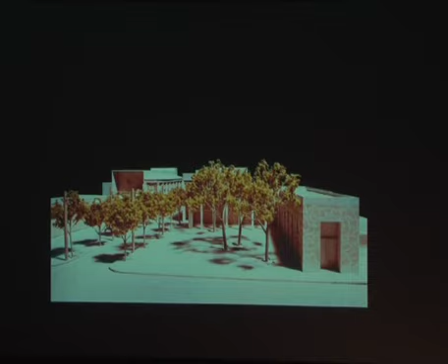Each of the buildings developed a similar architectural element, including a repetitive base system that organized covered arcades at street level, as well as open loggias on the upper story of the primary facades, as you can see in the sketch on the left. They also shared a similar palette of materials, including smooth stucco surfaces for the primary building elements, and in some cases colored cement tiles for architectural details.

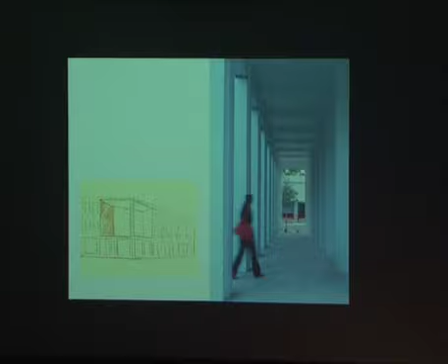Generally speaking, what we developed was a strategy for coherent lighting and streetscape design, which we thought would enable us to heighten the visual unity of the streets.

Returning to the plaza, which was always for us the heart of the project, we transformed the existing parking lot into an urban carpet of Caribbean oolitic limestone. The use of this limestone was very important because it's a material that connects the site to its geological region, to the area of Miami and the Caribbean, but also to Miami's public building tradition.

On the other hand, the edges of the new space were defined by a thin bar building and loggia. Here in this image, we see them fused together as a single building, these two.

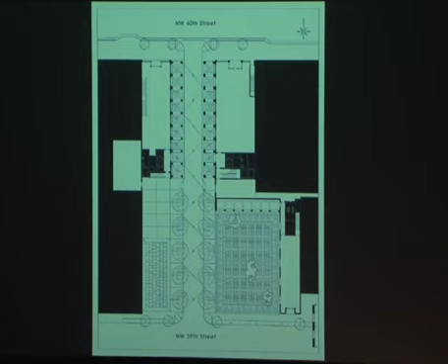We believe that this continuous urban wall would allow us to create frontages along the new space and the adjacent streets. Something important to mention is that both the form and placement of the thin bar building and the loggia resulted from the highly constraining and reduced space we had to work with, given the location of the existing large oak trees on the site.

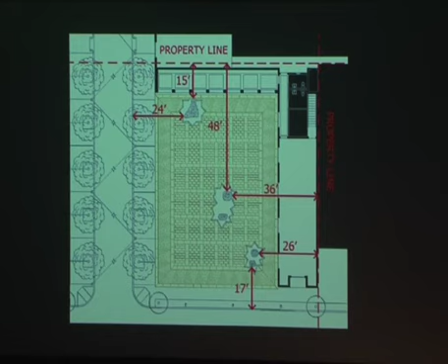So we literally developed a scheme that relied on thinness. Therefore, and almost inevitably, the building developed as an L-shaped building in plan that both configured the space of the plaza with a coherent urban geometry and also provided spaces for retail and leisure.

This early sketch shows our initial ideas of developing this single building that addressed the street and the plaza, becoming both, in a way, urban infill as well as liner. It also addresses different scales of events associated with each.

For example, in the case of the narrow door you see on the far right of the sketch, along the main street, this door is both proportioned and scaled to that event, while the 50-foot-long bench, which eventually would become integrated within the loggia, was scaled to the plaza and also to the view of downtown Miami beyond.

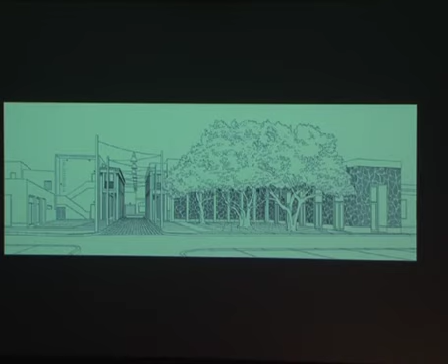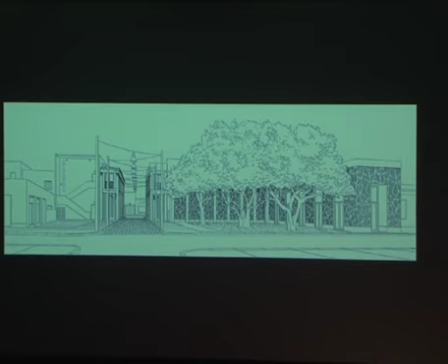When it came to the design of the actual building, we employed Miami's vernacular. We felt it was appropriate to work mostly with concrete block and steel trowel stucco construction, in the end cladding most of the building, most of the final surfaces, with a brilliant glass mosaic tile.

The references for the tile cladding are also associated with figurative traditions that can be seen throughout the tropics, but also the design district itself, since from the beginning we always thought that the elevations of the building should be understood as permanent urban paintings, or urban murals, let's say.

But we also used tile because we were aware that either in the Caribbean or in the distant landscapes of Thailand, for example, tile has been used in the cladding of buildings throughout the tropics. This, for us, made a great deal of sense, since these tiles provide an ideal skin for these tropical buildings.

Also, in the design of the elevations, the gradations of colored tile we thought would generate a rhythm of changing effects, which results in a kind of dematerialization of the building's surface.

We think that while these facades cannot be classified as lightweight curtain wall, in our minds they do constitute a kind of free facade, insofar as the visual quality of the surface is seen as kind of independent of the wall's tectonic conditions. Furthermore, as I just mentioned, we believe that the intense use of color and the reflective quality of the material would allow the buildings to be both cleansed by the incessant rains...

...and protect themselves from the strong light of the tropics, a light that most of you know could be very violent sometimes, and it bleaches and weathers its buildings in this region rather quickly.

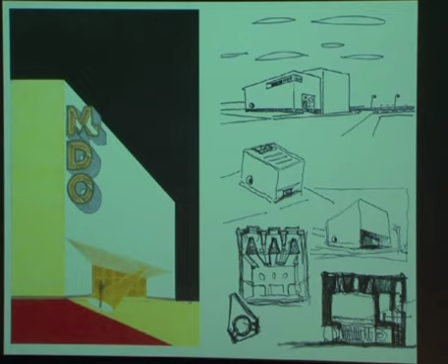But in a way, we also took it on because Carie and I wanted to engage a real, not an idealized, Miami Main Street, aiming to confront the aesthetic challenge of working within the quotidian commercial landscape, recomposing and transforming the elements of the commercial vernacular, including signage, commercial shopfronts, the suburban lawn, and even the painted asphalt that covers most of the city's streets.

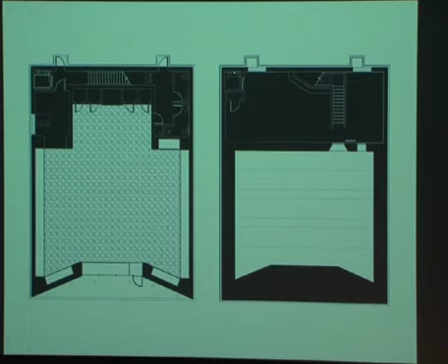The plan's thickened walls, these poché walls you see, are lined with stacked rows of merchandise, in this case mostly men's suits, placed around the main space in the front of the building, while most of the services, office space, and other rooms such as changing rooms are placed in the rear and on the second floor above.

In section, the heightened volume is an intentional shift in scale, meant to be an unexpected spatial experience for an area mostly defined by low 8-foot ceilings typically stacked one above the other.

The section also shows our concern with the manipulation of daylight. We chose to flood the building with natural light, converting the strong, direct natural light typical of Miami into a soft, indirect ambient light, in direct opposition to the somewhat cavernous, artificially lit interiors typical of the adjacent buildings, malls, and office parks nearby.

The skylights also provided us with an opportunity to hide some of the mechanical systems needed, such as electrical systems as well as air conditioning systems.

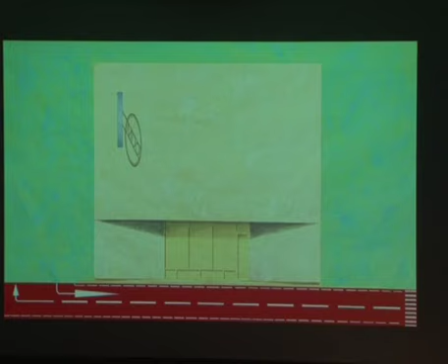As I mentioned earlier, this is a sketch drawn with gouache and Prismacolor. The project started at the beginning of the recession, and almost by necessity we were obliged to explore an architecture of scarcity. We developed a language of abstraction and restraint, where the range of materials and compositional moves were limited to a few carefully selected elements.

One of the most prominent elements is a 10-foot diameter metallic sign, placed perpendicular to the building's front facade. By removing this sign from the clutter of signage that punctuates the existing road, 8th Street, and setting it against a mute blank wall, that wall would provide a neutral backdrop—so an element that would otherwise be ordinary would immediately become special, perhaps even extraordinary.

In addition, as you can see in this image, the front elevation is inflected in order to compose a 12-foot high glass shop front and to produce a much-needed recessed space that protects the visitor from rain or sun upon entry.

We also thought that would imbue the building with a degree of corporality, a degree of solidity, which would again be in sharp contrast to the persistent thinness of the adjacent buildings.

Here, once again, we wanted to produce an illusion of thickness, so we poured a deep circular concrete window and pressed the glass deep into the space of the opening. This recess would produce a more dramatic shadow on the southern elevation, and would also highlight the compositional difference between this window and those of the surrounding context, while reframing the surrounding landscape as one stands looking out from within.

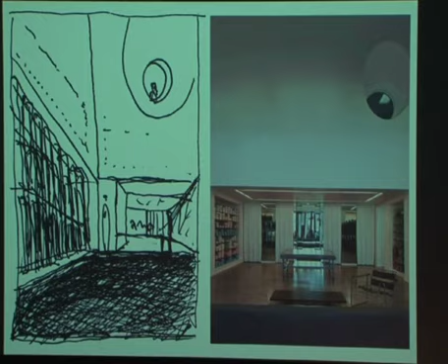This is a detailed view of the signage as finally executed, designed to be viewed from either 8th Street, Calle Ocho, or the perpendicular street from Calle Ocho. It also shows the thin cap that was designed minimally to terminate the top profile of the building, but also to articulate the building as it meets the sky.

So now we're going to have a change in project and a change in voice. I'm going to present the remaining 3 projects. This next project is, I think, quite different than the first 2 that Adib just presented.

The project involved the restoration and completion of a historic house located within Coral Gables, Florida. Coral Gables is located just south of downtown Miami. It was developed by George Merrick, a developer who, in an extraordinary way, also happened to be a poet. He was responsible for planning one of America's first garden cities.

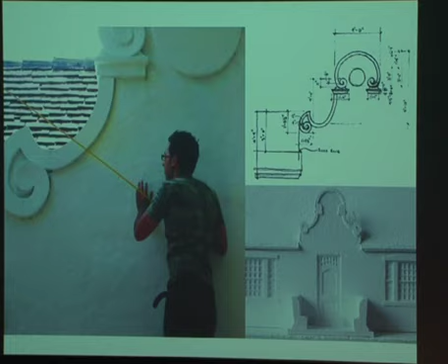Because what you have to keep in mind is most of the local builders in the area have in fact lost the knowledge of how to restore these historic details.

During the 1920s, the writer and leading Florida conservationist Marjory Stoneman Douglas, best known for her work The River of Grass about the Everglades, poetically described the architectural characteristics that defined Coral Gables' residential architecture. She spoke of the discrete elements that gave these houses their charm, including the undulating surfaces of the stuccoed walls, capable of catching and reflecting the intense Florida sunlight, clay roof tiles that created a rich watercolor-like pattern ranging from rust to pale greens, lime-based paints that gracefully weathered under the Florida sun, and finely crafted wood windows and balconies capable of opening the houses to the prevailing breezes.

When Adib and I read Stoneman Douglas' text, her words resounded with us, because these were the very same characteristics that were systematically being stripped away from most of the houses being restored within the city today.

Natural materials are always being replaced by synthetic ones that lack the craft and, more importantly, the sensorial qualities of the original. This reality, this very small reality, is changing the character of the streetscape and ultimately of the neighborhood. So for us, this project was about working slowly and paying close attention to those small things that we believe make a world of difference, particularly when repeated time and time again in the building fabric of the city.

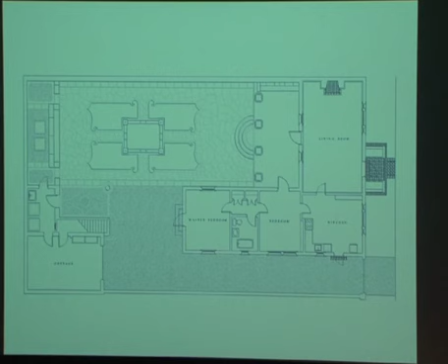I have to say that throughout the entire project, the words of our teacher, Vincent Scully, kept resounding in our heads. Scully was on the faculty while Adib and I were undergraduates, and he inspired generations of students.

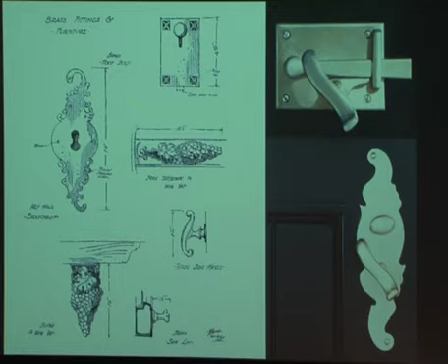This palette extended itself to the selection of objects for the interior, including all the furniture and the artwork, and we worked closely with the clients to develop the interiors. For us, the interiors bring together tradition and modernity, setting the work of contemporary Dutch designers such as Maarten Baas and Marcel Wanders alongside examples of traditional South African folk art. It is a world where the old and the new can comfortably coexist, and this is an affinity that resounded with us and with our clients.

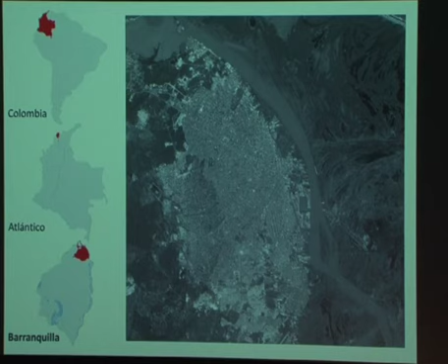Decades of suburban sprawl resulted in the abandonment of the city center and a slow process of urban and architectural degradation. So today, the city center is overrun by retail that generally occupies the first and sometimes the second stories of the buildings, with the upper floors largely vacant.

When Adib and I read the brief for the competition, we were struck by the omission of any discussion regarding one of the greatest challenges facing the redevelopment of the city, and that's this.

Now, Adib was familiar with this phenomena because he had grown up in Colombia. But I learned of it, and terrified, I experienced it for the first time when we were mapping Barlovento, which is an informal settlement immediately adjacent to the city center.

I'm going to segue here for just a moment to say that for the last several years, Adib and I have been mapping informal settlements in the global south. We began in sites as far away as Cape Town and Mumbai. But more recently, we've concentrated our efforts closer to home, not only because it's much easier to get there, but also because we speak the language, and so it gives us greater access to the cultural context in which these settlements take place.

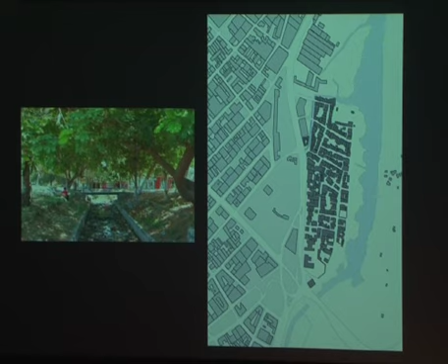On the other hand, the city center has no adequate way of managing that large amount of water runoff, and it is built over most of its natural gullies with no storm water drainage system. When we asked the planning officials about this, they seemed entirely unfazed. In fact, they compared their arroyos with severe New England snowstorms. They said to us, well, don't those paralyze the North American city for days? And that was the end of it.

But we returned to Miami and we felt the responsibility of mapping these arroyos. And so we set out to try to map the worst arroyos in the city and to see whether or not there was any way to overlap that map with the development of the public spaces.

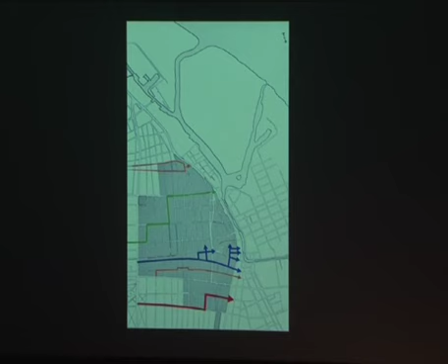And what we learned was that this arroyo, seen here in blue, which is one of the worst in the city, happens to actually cross two of the spaces that they wanted us to consider, one here at this end and then one along the far end here. And so what we decided to do was to add a sixth space to the design composition that would allow us to deal with this phenomena.

This is a plan of the proposed spaces located within the boundaries of the historic city center, seen here in the darker gray. You can discern the edges of the original settlement, slightly more medieval fabric here. And these are the existing spaces that the competition brief asked us to consider.

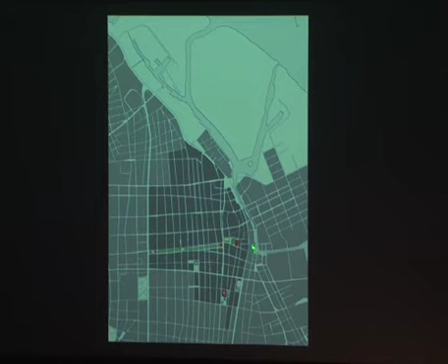What we did is we added this new paseo, which goes from the western edge of the city, Calle Murillo, all the way to Paseo Bolívar, which is this street here. This is the most important east-west street in the city, which actually ends on the Plaza San Nicolás, which is the most important and historic plaza.

And by introducing this new paseo, we would introduce another primary east-west road that conveniently ended in, again, the Paseo Bolívar and that important plaza. By doing that, we could dramatically increase the public space and also deal with the question of that water runoff.

A number of common themes united or surfaced for us in the design of the spaces. We were interested in sculpting clearly defined streets or urban rooms. We were keenly aware of the climatic conditions of the place. Barranquilla is extremely hot, so much so that it makes Miami seem temperate. So if you're going to be able to experience and thrive in the urban realm, you have to find ways to protect yourself from the sun.

So we were interested in developing an architecture with arcades and loggias and terraces and ways to mediate between interior and exterior. But we were also interested in employing natural landscape that could grow in the region with very little maintenance. The intense light also played into our thoughts for the selection of materials. We wanted to use resilient materials for the development of the public realm, including stones that we felt were capable of weathering this intense light.

And finally, I would say we were searching for inspiration in popular culture and even local building traditions in a way of trying to create a public realm that could be reflective of this place. So I'm going to just quickly show you some of the images that we produced for the competition.

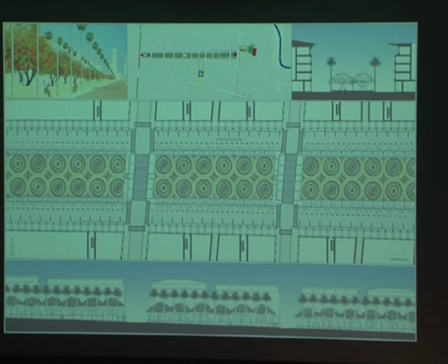This is an image for the Paseo, or the new plaza at the end of the Paseo. Here we proposed a new museum for the carnival that acts as an urban gateway to the city.

This particular plaza can be used throughout the year, but we imagined it being used during the time of the carnival, when they dance and have the comparsas, and all in the days leading up to the carnival. The programming of this building was significant for us, as the carnival is one of the most important cultural events in the city.

Today, the museum lies outside the city center, and we felt if we could place it back within the city center, we would be promoting the idea that the arts should be present along the commercial development of the city if it truly wants to create a rich urban environment.

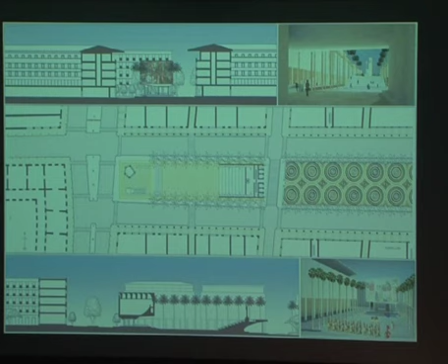The Plaza del Hospital, at the southern end of the Paseo Bolívar, is flanked by the existing Hospital of Charity. We redesigned the plaza and proposed a new school across the street that includes retail at grade and classroom functions above.

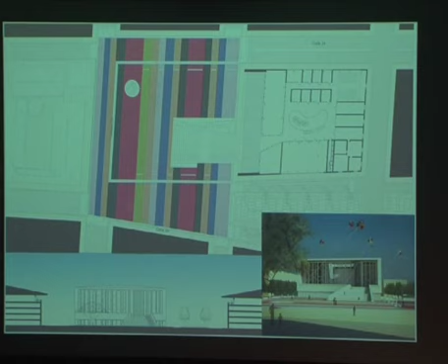For the south-facing elevation, we developed a deep loggia with a patterned screen that protects the interior from harsh light. The ground is detailed with stripes of brilliantly colored concrete, inspired by the colorful hammocks of the region.

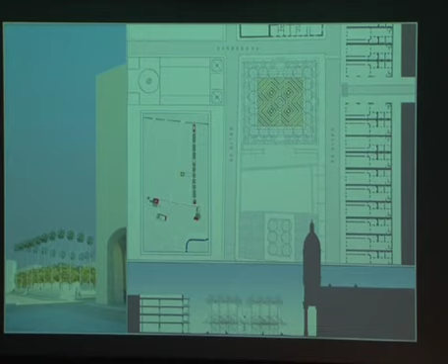This was the most modest of the plazas they asked us to look at, and probably the best defined urbanistically. Here we simply employed, once again, two scales of landscape: palms along the perimeter, and almond trees at the lower level closer to the plaza, providing ample shade, because underneath the almonds is a large pedestrian bench that collects the current disparate benches located throughout the site.

This is the Plaza San Roque, located immediately adjacent to the Church of San Roque. The roof is the most distinctive element of this proposal, and it is cantilevered from an L-shaped bar of program that houses the seminary and additional retail program within it.

The floor here, once again, is designed in varying patterns of yellow and gray, with urban furniture and a large statue of St. Rocco, the patron saint of the city.

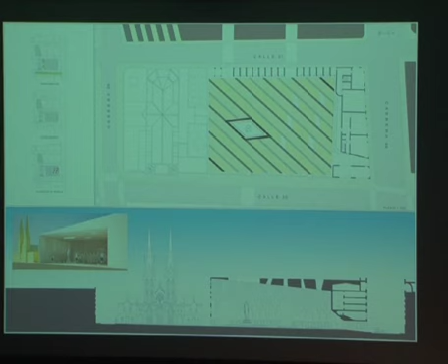Finally, the Plaza San Nicolás, previously the Plaza de Colón, is the oldest plaza in the city, and the space around which the original development, or the original settlement, was formed.

Our first desire was to reopen the streets that once surrounded the plaza so we could better connect the existing space to the surrounding fabric.

We divided the plaza into two zones: a heavily landscaped space in front of the church, and a smaller triangular plaza to one side. Once again, you see the use of the yellow and gray floor patterns of caliza stone and granite that we felt tied this space to the others of the proposal.

We proposed the use of pink oaks for the main space for two reasons: it is the emblematic tree of the city, and it is striking for obvious reasons because of its intense color, but it is also incredibly rugged and capable of withstanding the harsh climate.

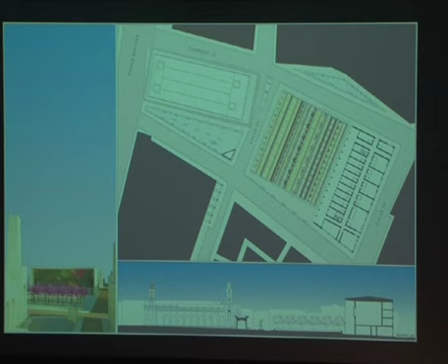This is the last project that we will show you tonight, and it involves the design of a large corporate headquarters for a sugar mill in southern Guatemala. The project is currently under construction, and it has allowed us to confront the challenges of designing a large public building.

The client brief provoked us to think about the ways in which a building can change the culture of a company and impact the way in which we communicate.

The project is located within Guatemala's lowlands. This is a flat coastal landscape where sugarcane fields rise more than 6 feet. To the north is Guatemala City and the extraordinary Agua and Acatenango volcanoes, and to the south is the Pacific Ocean. This is largely a semi-tropical environment with a cycle of hot and very humid, dry and wet seasons that tend to produce areas of great flooding.

Our clients are the owners of the sugar mill seen here to the right. And they approached us with the desire to create a building that could express the company's collaborative and creative spirit.

In recent years, the company has been experiencing rapid growth, and it has been building a series of ad hoc structures throughout the farm to house the different departments. Now, the problem with this way of working is that they are developing a spatial and physical layout which is fragmented, and it causes a breakdown in communication.

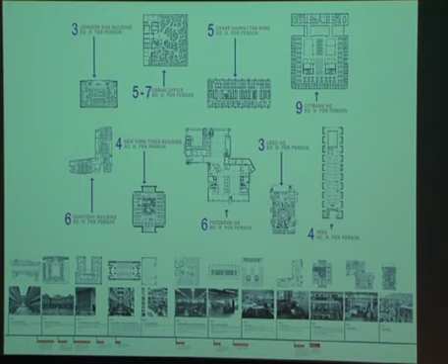On the other hand, companies like Lego or Facebook offer between 3 to about 6 square meters per desk, which is dramatically less than the previous example, but they offset this by creating a substantial amount of communal spaces where creative ideas can be generated by groups or even individuals.

While compiling this research, we had to not only come to terms with the particulars of the work environment, both from the overall space down to the individual desks as seen here, but we had to come to terms with how large the actual principal workspace would be.

This seems like a fairly straightforward piece of information, probably something that the client would provide you up front, but in fact it turned out to be much more difficult to determine. Because as I mentioned earlier, the current company has about 150 individuals, but they're quickly growing, so the number of employees isn't fixed, it's actually a moving target.

Beyond figuring out how many new people they wanted to hire, the clients turned around to us and asked perhaps a more fundamental question. They wanted to figure out whether or not an ideally sized working environment existed. When did someone feel part of a community, and when had it gotten too large that the networks of communication begin to break down? I have to admit that Adib and I felt like fish out of water regarding these questions.

After all, we were architects. We were not anthropologists or psychologists, even though these skills are particularly helpful in private practice. But what we were clear about was that we had hit an impasse. We could not advance if we could not determine how many people would be housed in the building. So we set out to try to help the clients make this decision.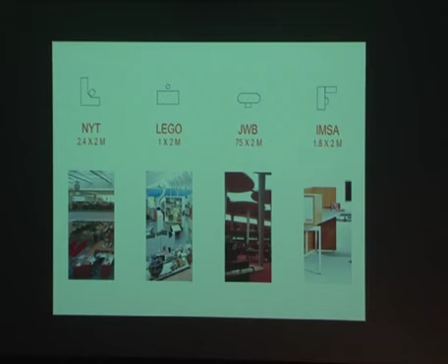I'm going to apologize in advance for anyone in the audience who has a degree in anthropology or psychology, so needless to say, we are novices. But we did want to share this information with you, particularly with the students, because as architects, you need to be resourceful and inquisitive, and more importantly, find proactive ways to advance a project. So finding information that could assist our clients in making a decision became our immediate goal.

We came across the work of British anthropologist Robin Dunbar. Dunbar believes that a single individual can maintain a stable, socially cohesive group with somewhere between 100 and 230 people, but he sets his ideal number at 150.

He tests this hypothesis with observable group sizes for humans throughout the ages, starting with Neolithic farm villages and tribal villages, which he found that once they reach about 150, would break off into another village. Or the basic unit size of professional armies in Roman antiquity, or in modern times since the 16th century. These, of course, are groups that rely on close collaboration, not only for work, but for survival, where the unit often needs to work as a single entity.

More recently, anthropologists H. Russell Bernard and Peter Killworth took Dunbar's number as a point of reference, but then did a number of field studies in the United States, and developed an increased number of 290, with a median of 231. They attributed this increase to technological advances, our digital age, which provides dramatically different ways for us to communicate and build social and working networks.

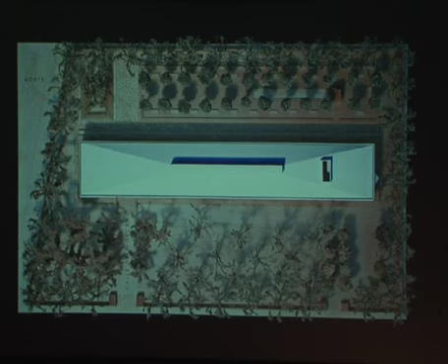The building's long axis, aligned east and west, allows us to place it parallel to the main road, while providing us an opportunity to establish the main entry on the north-south axis, which allows us to frame a direct view to the volcanoes beyond.

This is the site plan, where you can see the project surrounded by the sugarcane fields to the north and to the west, with the current company's set of buildings seen here to the south.

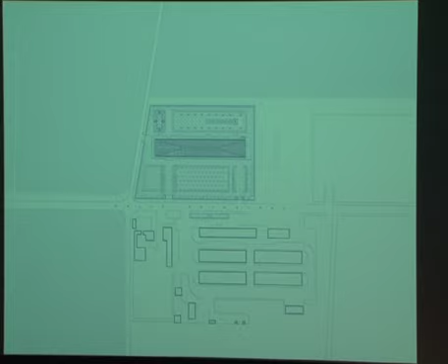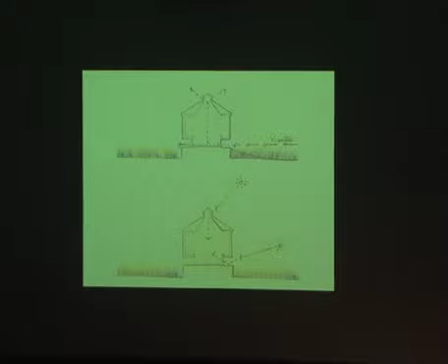We think the project could be described in three parts: the plinth, the wall, and the roof. This early sketch shows our desire to raise the building off the ground so that we could set the first floor above the height of the existing sugarcane fields. Lifting the building from the ground plane allows us to capitalize on the prevailing breezes from the southwest, and it protects the building from floodwaters during the rainy season.

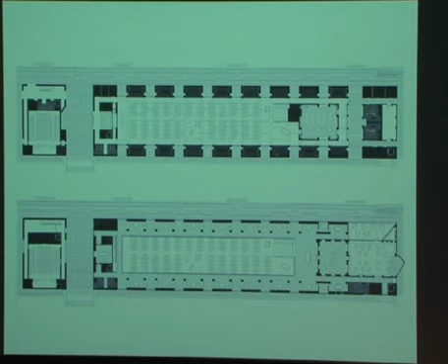This is a series of analyses of the central portion of the building where we were analyzing desk arrangements, making references to that early research that we were doing. We looked at different ways to organize those desks, either linearly or in clusters, determining the most efficient way of laying the space out, but also what those different arrangements might produce in terms of the working environment.

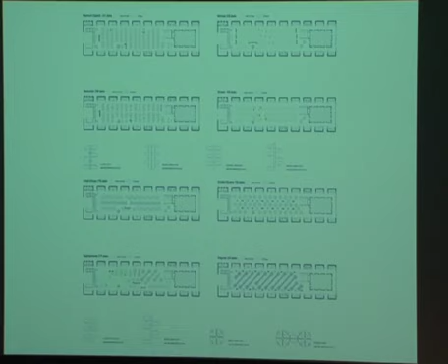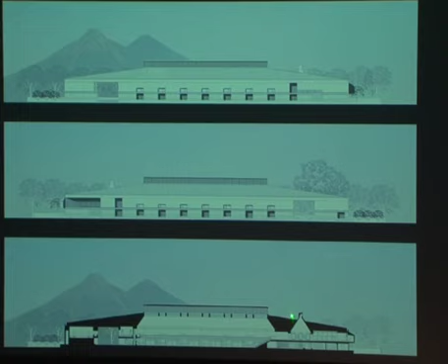These are the north and south elevations of the building, and a cross-section through the reading room showing the relative thinness of the building within the precinct and the surrounding gardens.

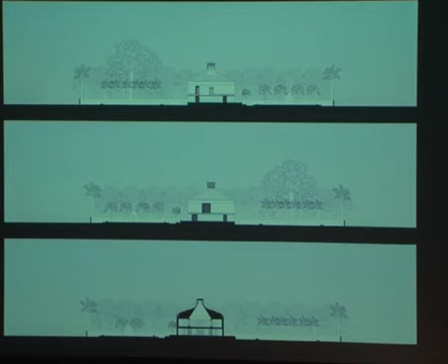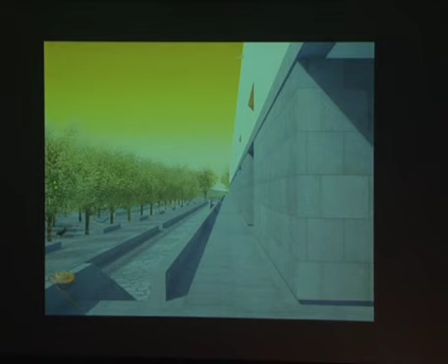Lighting in this area of the world is particular. Being so close to the equator, the sun is almost always directly overhead, so very little surface projections can produce dramatic shadows.

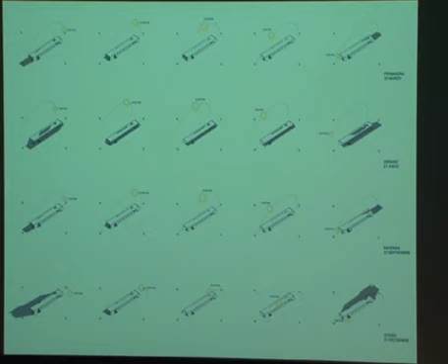The overhead light directly influenced the design of the skylight, which is probably the most important light-emitting element in the building. We limited the glazing of the skylight to the side walls and further protected it with a system of louvers to ensure protection from direct sunlight, which can be very, very intense.

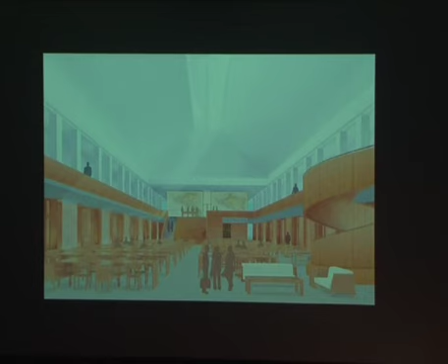Drawing plays an important role in our work. I believe Adib and I are part of the last generation of architects, or maybe the transitional generation, that was principally trained by hand. The computer came into our repertoire of tools during graduate school, and today we use these mediums interchangeably depending upon the investigation or the desired outcome.

I would like to say that these drawings in particular explore a mix between hand and digital drawing techniques. Here we're not only interested in depicting the building within the particulars of its geographic and cultural context, but also in the narrative of the drawing, depicting the scene at a precise moment in time. In this case, the building is drawn on the day of the zafra, which is the cutting of the sugarcane.

It is a day of great celebration where a large statue—and this actually happens, it's not a figment of our imagination—of Our Lady of the Rosary leads the festive procession through the fields.

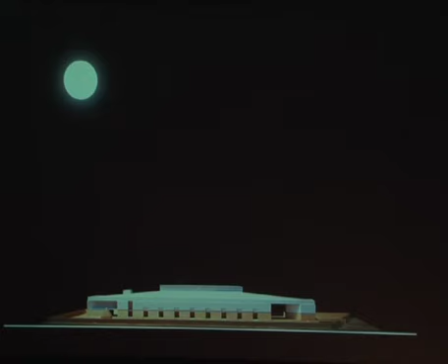So while uniformity has become a global epidemic, and placelessness is now perhaps an integral part of our everyday lives, the projects that we have shown you here tonight are conceived otherwise. We are exploring the potential to create drawings, spaces, and even buildings of cultural specificity, where tradition and invention, the colloquial and the academic, the regional and the universal, participate in the composition and construction of the contemporary city.

We wanted to just end on a short video. We hope that this will work with a little bit of sound because we couldn't take you to the Caribbean without having a little bit of music. Let's see if it comes.